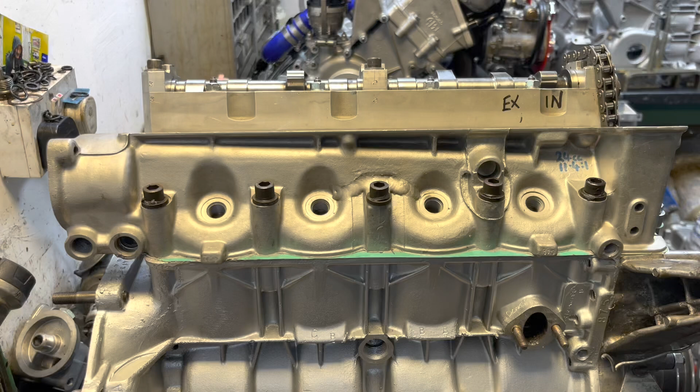Morning YouTubers. Today's video is going to be about how to time up an unknown camshaft.

Now, lots of camshafts have been made for Hillmans over the years, and one of the most frequent phone calls I get is from people asking the question, what do I dial this in at? It's doing this, what should this be? And I'm like, well, all I can say is, as a rough guide, we always say put the inlet between 15 and 20 thou ahead of the exhaust. And that probably sounds like complete gobbledygook if you're a bit of a newbie to engines.

But what I'll try and do is not digress and go down loads of different roads. I'm going to talk about the engine as a one-cylinder engine with the two valves and the cam lobes. And basically, if you've got a Hillman with an unknown cam and you want to time it in, by the end of this video I'm really hoping you'll be able to do that.

So this camshaft in this customer's engine, there's no literature on it. It's called a GB72, which is an old school George Bevan camshaft grind, and I assume that 1972 was the year of manufacture. So maybe this was the cam that they used in the touring car championship in 1972. So really nice piece of old kit. It's actually a steel cam as well, so it was probably one of his race engines of the day.

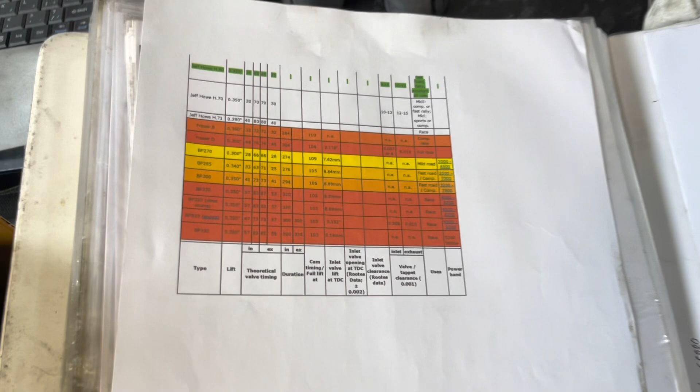So I go over here now with the camera to my little book, and we've got all different camshafts and the specs, and I basically can't see anything about a George Bevan camshaft. So what are we going to do to time it up? Well, as a first step we're going to find a really good TDC. So imagine you're in your garage now, where you need to know when the piston is at the top of the bore, because that is where we set the camshaft.

So what we do is we get some paraffin or diesel or kerosene in a little Fairy washing up liquid tub like this. I use this for CCing, but this will serve the same purpose.

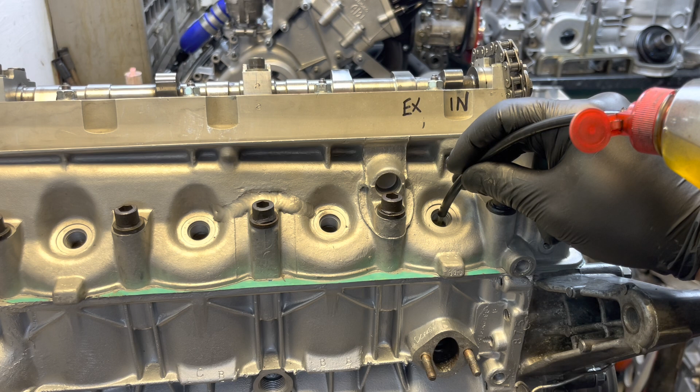The easiest way of getting a good TDC figure, in my opinion, is make sure the lobes are at the top so that that cylinder is sealed, both valves are shut, piston's near the top, and then we just squirt the fluid into the cylinder chamber until we see it at the bottom of the spark plug thread. Okay, I can see it now.

So what we do then is we put a spanner or a socket on the crank, and basically we move it backwards and forwards until we see the fluid at its highest point. So I'll just try and get a bit of a zoom in on the camera. That's the wrong way. Oh, right, great. So we can see that.

Are you ready for the posh word that I learned off the internet? The meniscus. I've been practicing that for you guys. So that's the fluid that makes a funny shape because it's got surface tension. So we can see that just there is our highest point. So we know that is when the chamber is at its smallest size and the piston is at its highest point.

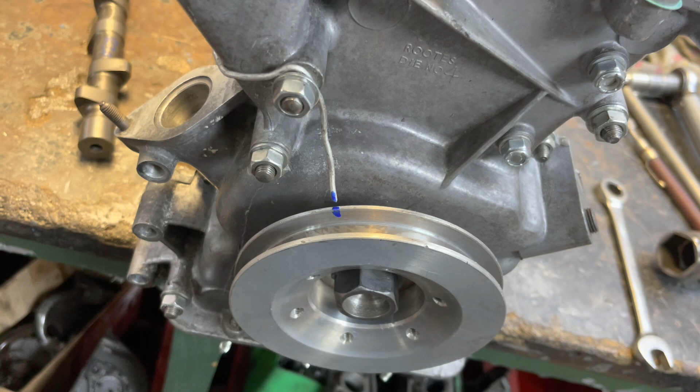Now, what I like to do when I'm timing an engine up: it's great having a bit of a paint mark, but if you just get a bit of old solder or aluminium welding wire, as I've got here, wrap it around the nut, tighten it up, and get it really close to the front pulley, you can make yourself your own TDC marker that you know is going to be accurate, because we're going to have to come back to it and forward from it while we're doing this operation. So it's really good that we've got a TDC marker.

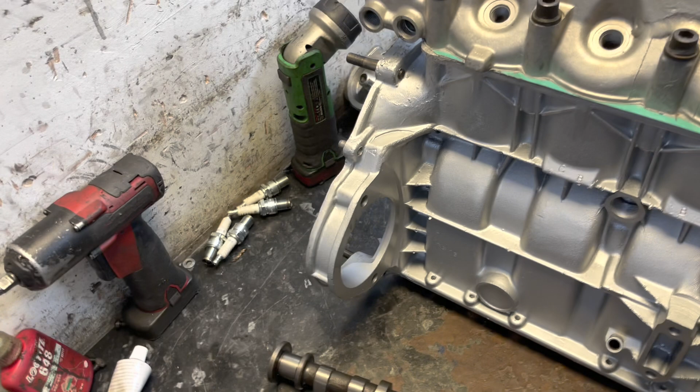So what I'm going to do now, it's always good practice when messing with cam timing, we'll just bring it away from top dead so that if we start moving the valves, we're not going to catch the piston. And then we're going to talk a little bit more. I've got a demonstration cam here, just to talk about the camshaft and how it works.

So if you've watched any of my other videos, you'll know I like talking about overlap, which is where we hold the valves open on the exhaust stroke, at the top of the exhaust stroke, to cause the scavenger effect, so we get a good cylinder fill and a really good bang.

So a race camshaft like this, if you look at the lobes, you'll see they're both higher than the base circle. So what that means is when these are obviously pointing downwards, it's on overlap. Both valves are held open at top dead center, and that is what we call a TDC lift figure. So we haven't got any figures for this cam.

So what we're going to do is put a clock gauge on it and measure what we've got on the inlet at top dead center, or we're going to get evens, sorry. So we'll wind it on so the buckets look level, and we'll back it off, measure the inlet, then go back to 0, and then we'll wind it off on the exhaust and measure that, and that'll give us 2 figures. And from them figures, we'll determine an evens figure.

So say if we do it to start with and we didn't quite get it right, we might get 160 thou on the inlet, 140 on the exhaust. So then we'll go back and try for 150, 150, and basically we'll balance it out. When we've got that top dead center figure, that evens lift figure, then we can decide how much advance to put on the cam, depending on what it is.

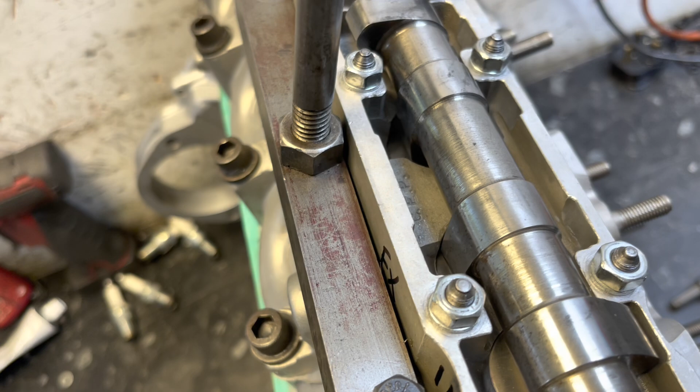So I'm going to move the camshaft around because we know the piston is out of the way. And what I'm trying to do is gauge what I think is a good evens figure, just to start with, before I put a clock gauge on. So I'm just trying to gauge how far the buckets are, which is really hard on this engine because it's got this lovely Carter cam carrier that stops it from seeing.

So what we'll do is, you might not have this option because you've probably got a manifold on, but if you've not got a manifold on, what you can do is look down the port at the back of the valve. I'm going to try and shine my light. Can you see the inlet valve is open there? There you go, you can see it.

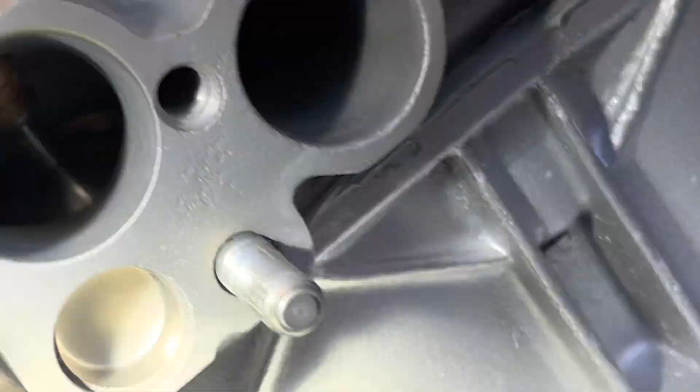The valve's open there, and the exhaust valve, if I can get the torch to line up at the right point, is open more. You can see that's open more. So we need to back it off a little bit. So we'll back it off a smidge. Just bring the camera out.

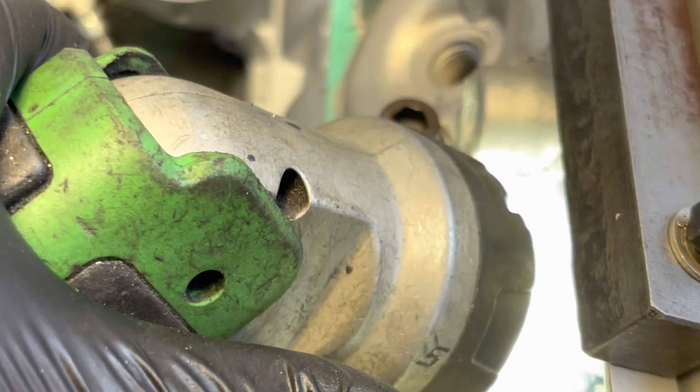So I've set the valves evens at top dead, or as close as I can by eye. And I just realised when I was trying to hold the torch and the phone, there's an easier way of doing this. Basically, if I shine the torch down the plug hole there, the light bounces off things in the chamber, and if we zoom in, we can see that the valve is open on the inlet and on the exhaust, and they look pretty even to me.

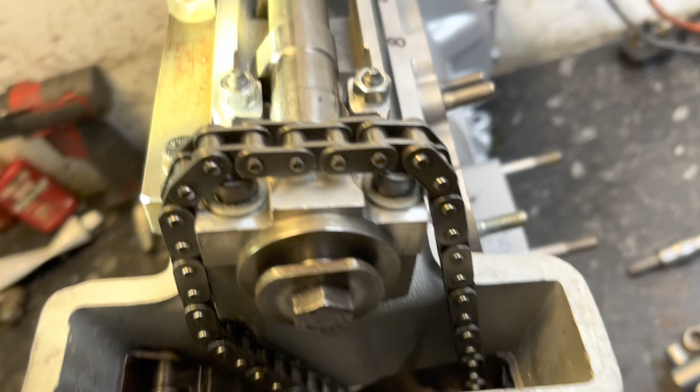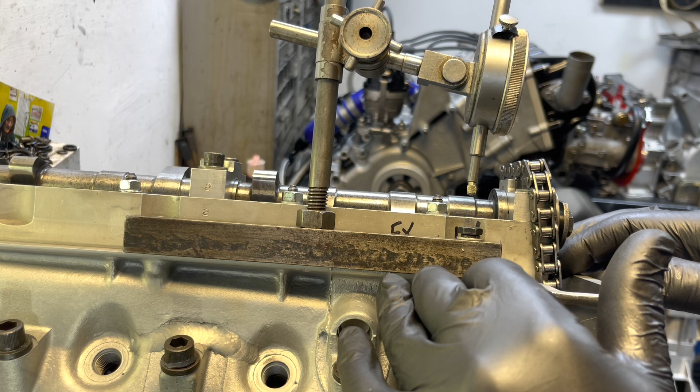So we'll put the clock gauge on now. If you haven't got a clock gauge, you can buy all this stuff off eBay. This is quite a nice one because it's on a nice block that bolts, but you can just have a piece of plate that bolts to the cam cover face, and then a magnetic base with a clock on it. All this stuff is really, really well available.

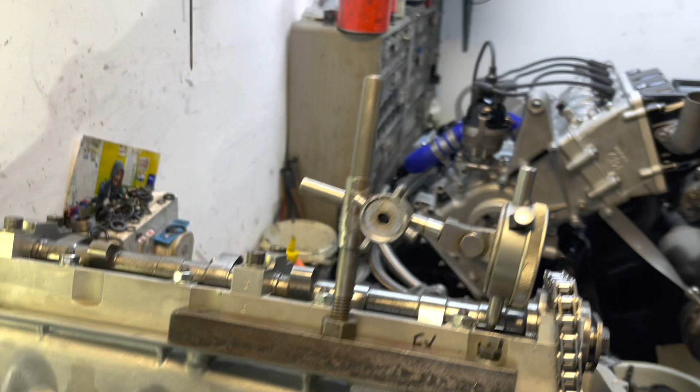So what I'm going to do is put it on the top of the bucket. Just put a little bit of pressure on, so we just see the needle start to move. And then we're going to wind it off and measure the lift. So we have to zero it. I'll spin the engine a little bit so that we can get a good visual on this with the camera for you guys.

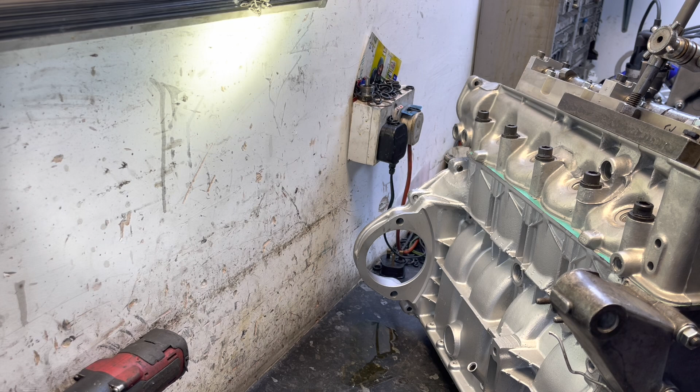Right. Wedge the engine a bit so it doesn't rock around and spoil the camera view. Should have prepped this better, shouldn't I? Never mind. Right, engine's quite steady.

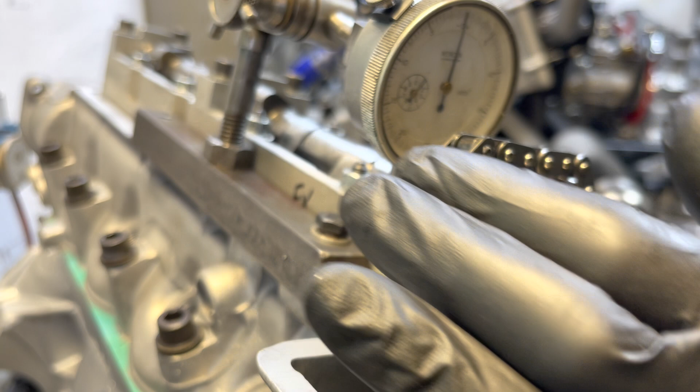Right, so if I set you up like that, hopefully you'll be able to see exactly what I'm talking about. I think the cam is in a fairly even position. So I set the clock to zero, and then because the cam lobe is on lift, we have to go in an anti-clockwise direction to bring it off lift. First thing, we know the crank's in a safe position, pistons aren't near the top, so I'll start backing it off.

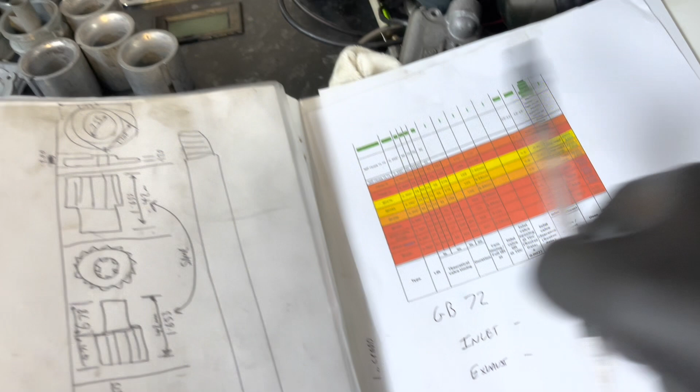So one revolution is 50 thou. Two revolutions is 100 thou. That's 150 thou. And then we've got 150, 5, 10, 15, and 2. So that's 17 added on to our 150, so it's 167. So we just add to our sheet some information here. We're starting with 167 thou on the inlet.

Then, very simply, we have to get back to our start point before we can measure the exhaust. So I'm going to put lift back on the valve now. We've wound it off so it's got no lift, and I'm winding it back on. That was our 17, that was our 50, that was our 100. And when we get to zero now, that should be our 167. Right, so we're at zero again now. The cam is back in what I thought was an evens position.

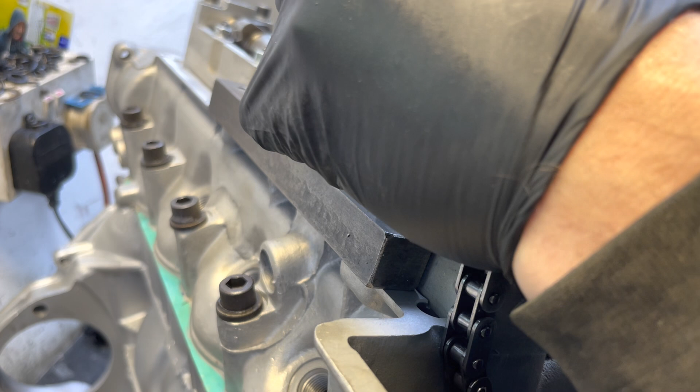Then, dead simply, move the clock gauge over to the exhaust cam follower and bring it down. Always try and hold the clock gauge as vertical as you can. Because as the follower comes up, if the clock gauge is at an angle, you don't get a true measurement. So it's very important to keep the clock gauge as straight to the cam follower as possible to get an accurate figure.

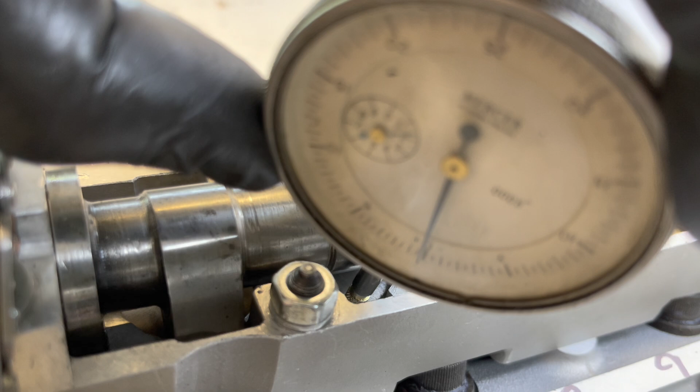Right, let's get this around here. Bring this down a little bit. Okay, so we're on the exhaust now. To wind the lift off the exhaust lobe, we go the opposite way, in a clockwise direction, because the lobe is over here and we want it to come off lift. Can we see that? Move the block a little bit, try and get it as clear as possible for you guys. There you go, that's a bit better.

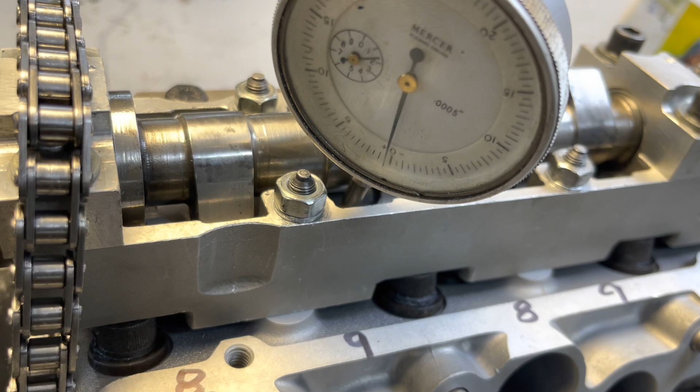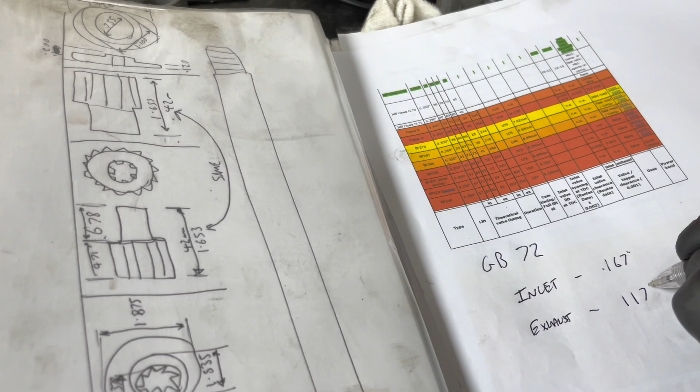Okay, so I'm going to wind the lift off now in a clockwise direction. So we've got 50, 100, and 117. Right, so I didn't get that right, did I? 117. And the reason I didn't get it right, although it looked good, is probably that the valve heights aren't uniform. So when looking through the chamber, you get a bit of an iffy image.

So we look at these figures now: 167, we call it 170, and 120. That would be too much. I think this is going to be evens at about 140. So we'll zero this because we're off lift, and we'll put 140 thou on it, and then we'll see what that gives us on the inlet. I've got to go anti-clockwise now to put the lift back onto the lobe, onto the follower. So 50, 100, 125, 130.

That is 140. It's just the camera angle looks bad. Right, so that's 140 on the exhaust. Now what I'm going to do is I'm just going to put a little marker referencing where I think the evens figure is going to be. So a bit of a mark on there with blue paint.

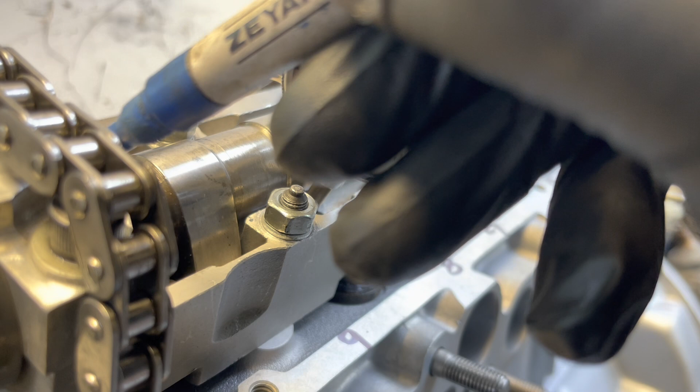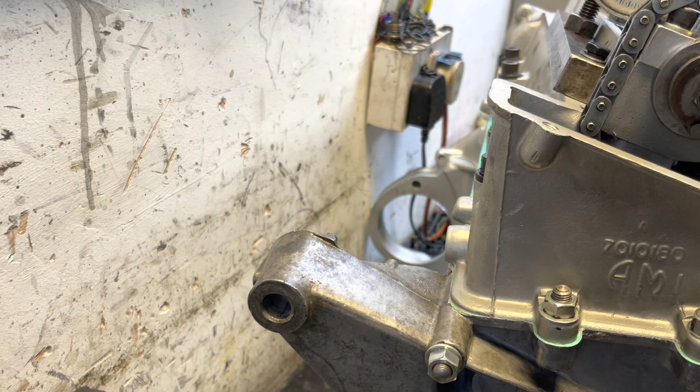Right, and then what I'll do is bring this over to the inlet side and bring it down, and we'll wind it off and see what we've got on that. So I'll bring the camera around there. Okay, so we're back on the inlet cam now.

And I want to basically wind off from there. So I'm going to zero it and go in an anti-clockwise because it's on lift this way. So it's the opposite from the exhaust. So 50, 100, 150, and let's call that 158. So 158, 140.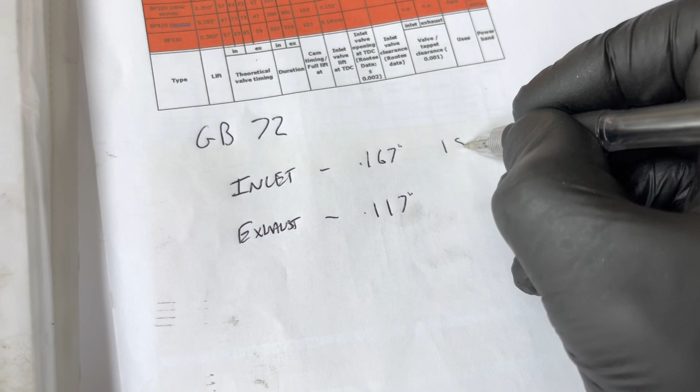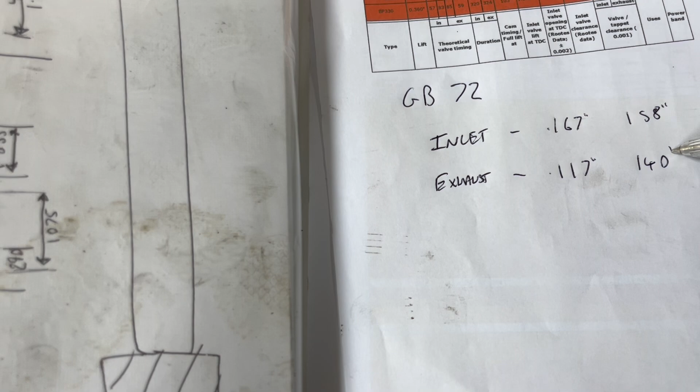So we'll write these figures down here. So we had 158 on the inlet and 140 on the exhaust. Now that is actually giving us 18 thou more on the inlet than the exhaust, which, to be fair, is probably where I'd like to start the cam off.

What you've got to remember when you're dealing with a cam like this is having it 5 thou ahead or 5 thou behind doesn't necessarily kill the horsepower. It just moves it. It's robs and gains. So with a camshaft, the more you advance the camshaft, so the more lift we have on the inlet, the lower down the torque curve the power is produced. And if we retard the cam, so the figures are more evens at top dead, then the further up the power band we produce the power and we lose mid-range torque. So it's all robs and gains.

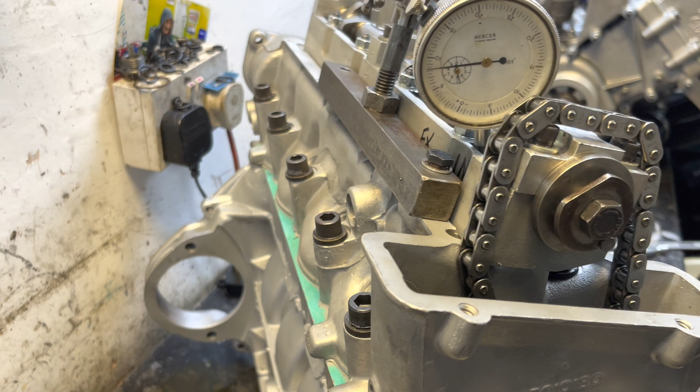So I'm actually quite happy with that at that stage. I think 158, 140 is a good starting point, and we'll put it on the dyno. And if it's happy and doing the predicted sort of torque and horsepower I want it to, we'll leave it alone. And if it isn't, then we'll revisit it. But I'll turn this off now and we'll go to the next stage.

Right, before we go through the next stage, which will be timing up the camshaft with the chain relative to the crankshaft position, there's something we should always do when we do an engine build. Really, this should have been done at an earlier stage than I'm doing now. But if you've got to this stage, it's still good practice to do it.

Now I know, because I did it when the head was loose with no valve springs on, etc., I know what the total lift is before the valve contacts the piston at top dead center. And this is a very important figure. I use a figure of 250 thou. And what that is, I use my little mitts to describe it. We've got our inlet and exhaust valves. So the piston comes up and basically, I've done that wrong, haven't I?

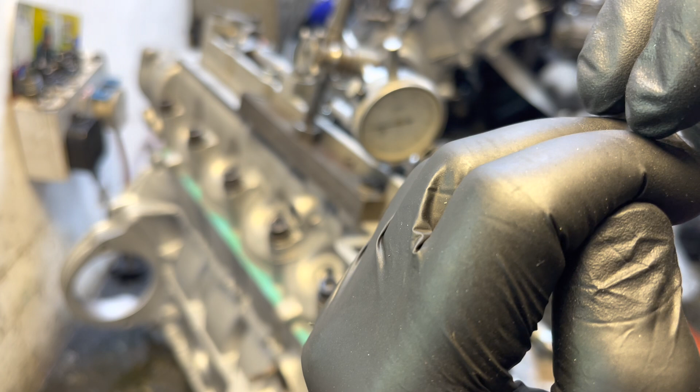So the exhaust valve has been open as the piston has come up, and then the inlet valve started to open, so we get the scavenge. So there becomes a point where, as the piston goes down the bore, the inlet cam chases the piston down the bore. And when we're using modern profiles especially, the acceleration of the valve can be so fast that even though we've got clearance at top dead center, just after top dead center the piston's dwelled, you see, because of the angle of the rod. The valve catches up and hits him.

So we're running on this engine 158 thou of lift at top dead center, but the piston won't have moved much at, say, 10-15 degrees crankshaft rotation, and the valve will have accelerated and will be chasing him down the bore. That's why we need a minimum really, on this cam, of 220, 250 clearance at top dead. There's a really easy way of checking it, and I'll show you.

So basically, we've got the piston, the crankshaft here. I'll just bring this round to our marker because we've had it in a safe position all this time, haven't we? So I'll bring him round. Oh, I just have to move the camera out of the way. Right, we just have to start again with this because I noticed that the camera had dropped down and you couldn't see the clock gauge, and I wanted you to be able to see that, so it gave you a better idea of what was going on.

So we've got the piston well down the bore, and basically what we're going to do is put a bit of lift on to get the exhaust cam out of the way so that we can come back to top dead center, because really we should do this with no cam in it and with no valve springs on it and the head just bolted on, so we can measure the little clearance. Anyway, that's where we're at.

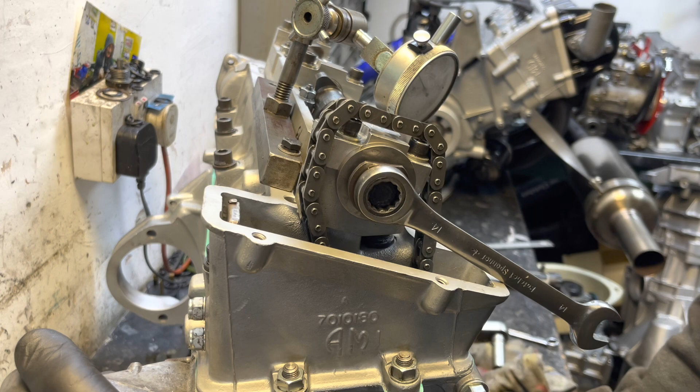So what we've got to do now is we'll bring this back, and I'll go to my blue marker that I made on the cam, because I know that means I've got 140 thou lift on the exhaust. So we'll zero it on the exhaust now, and try and get a decent camera angle for you guys.

Right, so what I'm going to do now is wind the lift on the exhaust cam until that one contacts. So we know we've got 140 because that's our blue mark, which was what we wound on before, if you remember. So we've got 140, that's another 50, so that's 190. And we've just come shy. So it's 190 plus 200, 210, 220, 230, 235. So we've got 235 on the exhaust as well.

So absolutely fine. That's plenty of space for it to get out of the way, because obviously at top dead center the exhaust was running less lift, 140. So we've got ample clearance there. So I'm happy with that. So what we'll do now is get the chain ready to go on and time up the camshaft relative to the crankshaft. Right, now there's the exciting bit, the good bit. We're going to time the cam up.

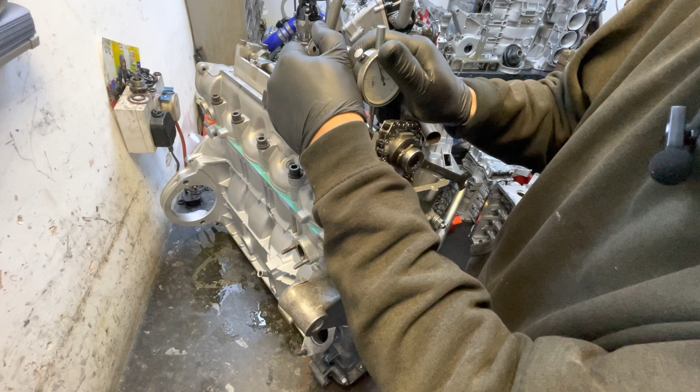So first thing we do, move the crankshaft away from top dead center so it's in a safe position, so when messing about we can't get any valve contact. Second thing, we wind the lift off the cam so we can put our 167 thou on it. So I've wound it off there. Just give that a bit more. So we're definitely no lift on number one inlet, and then we'll put the clock gauge on the first cam follower, wind it on a fair bit like that, so it's got plenty to come out. We'll zero it, and then we will put the lift on the cam.

So we've got 50, 100, 150, 160, 165, oh, one too far, one too far again, 167. Can you see that? Has the camera got that? Yeah, great. Right. So our cam is in our TDC position now. We'll just put a paint marker on here so I can roughly reference it in case I get confused, which is quite possible.

Right. Now, what we need to do next is take this front pulley bolt out. So what I'm going to do, which you're all going to cringe at, is put some mole grips on the camshaft because they didn't put a hex on them from factory. It won't mark it because it's rock hard. So we'll just jar the camshaft up like this, and hopefully it won't move. Okay, and then crack that off. Are we still on 167? No, it's moved. That's great, just what we needed.

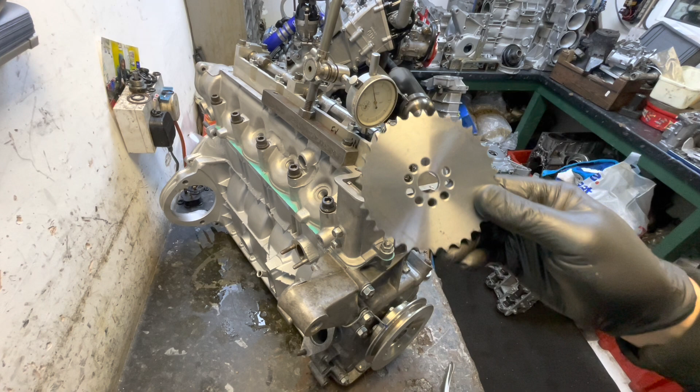And then what I do is, if you can see, bring the crankshaft back round to top dead center. So we've got a little pointer there, and this is called a multi-hole sprocket. Very clever. All these holes are in different relations to the gears, so they're about 5 degrees apart. So in theory, we should be able to get a hole that matches up with the dowel, and then we can get the cam timing correct.

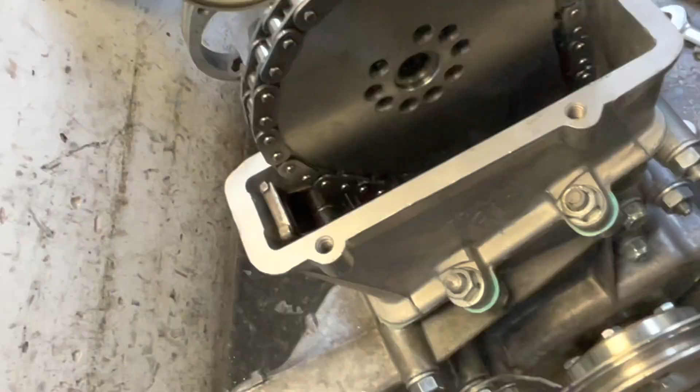So, very important, one side's got a big chamfer radius. Obviously that goes face down so that the cam wheel can sit flat against the thrust face of the camshaft. So there we are, that's the cam sprocket on. Let's give him a little sensor. Also, definitely something worth noting is if we look inside here, this little slider, it can go 2 ways, so it can flick over this way and get caught in the chain. So always make sure it's sat against this little slider that it runs in.

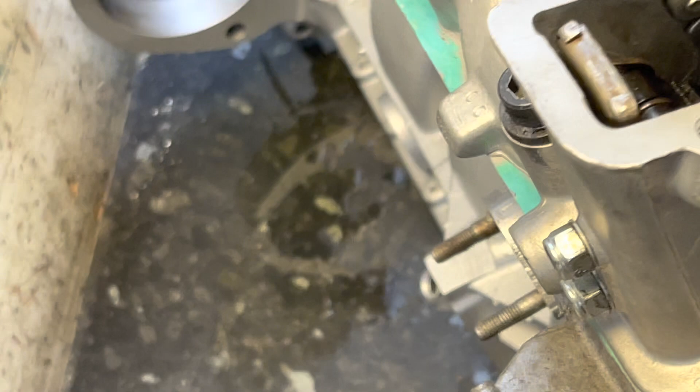Okay, now what I'll try and do is change the angle of this so that we can see into the end of the camshaft and see the line up on it.

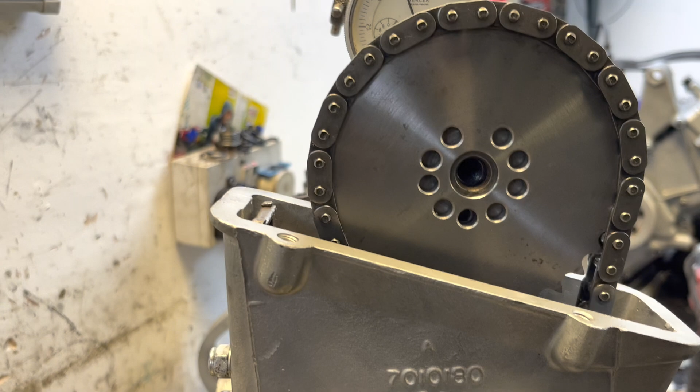Oops, that was clever, wasn't it? Broke the phone midway through. Right, is that showing what I want it to show?

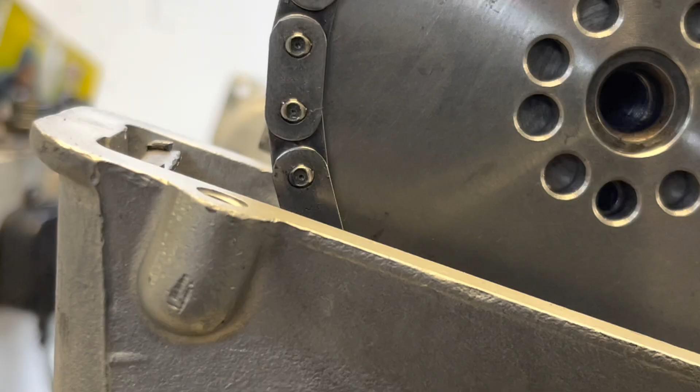Nearly. So if you look through the holes, you can see this bottom one here. Let's just get this a little bit further over. Right, can you see in this wonderful setup off eBay that I bought for about £3.50 straight from Ho Chi Chong, the dowel isn't quite lined up. That's our TDC figure there.

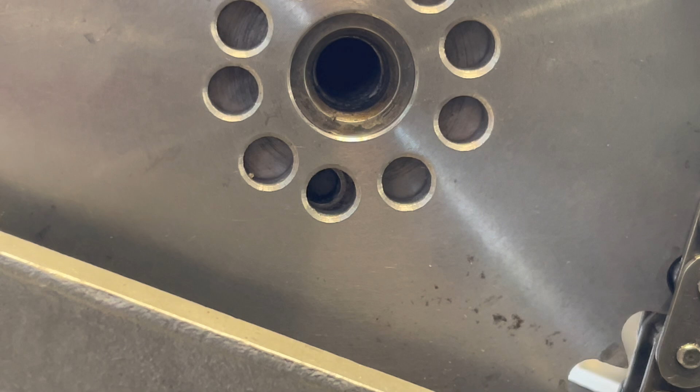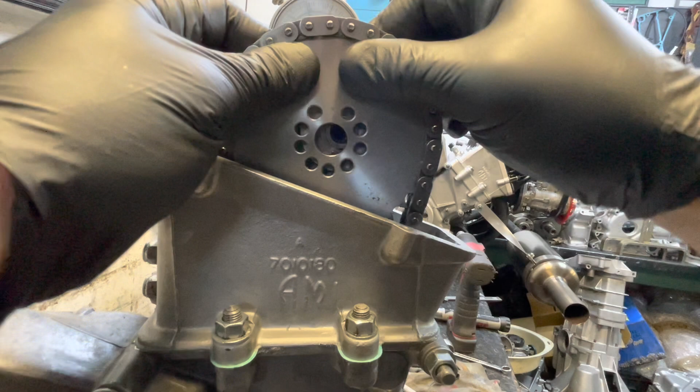Right, okay, so what we need to do is basically we slide this off the end of the cam. Just come out a little bit on my zoom so we can get my fat finger in there. Okay, so we know the crank's in the right place, so I'm just going to move it one chain tooth at a time until I see the hole line up perfectly.

And believe it or not, I can't believe it. That never works like that. The second hole I've come to does actually appear to be absolutely crack on. Can you see it? So what I'm going to do is offer up the pin and see if he wants to go in. Let's give him a gentle tap because they are tight. Yep, that sounds quite good.

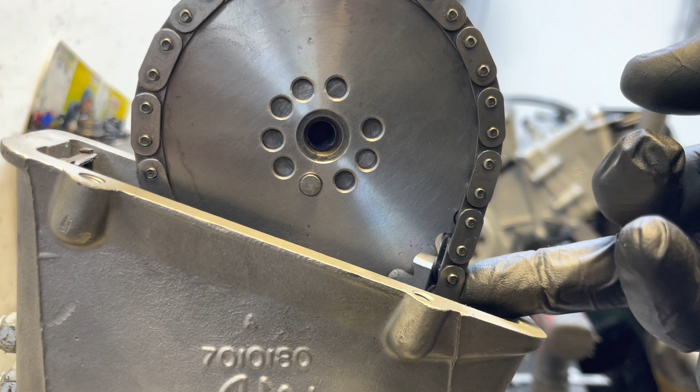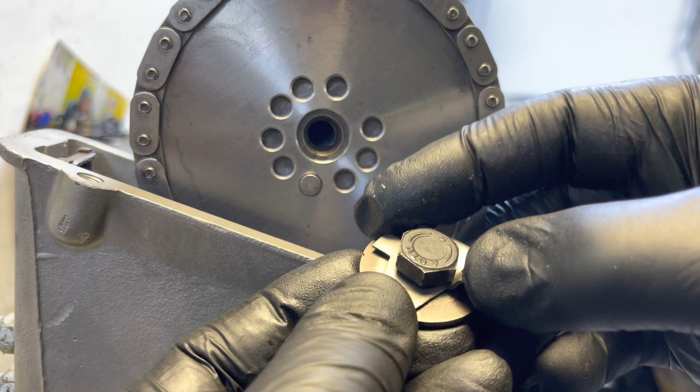Now, if I zoom out, you'll see that through all this operation, we need the chain to be tight on this side because that's the side I'm measuring from. So now, obviously, when I put this together properly, I'll be Loctiting all of it, etc. And you have to use a tab lock washer for one important reason, which I neglected to realise once, and that is this washer, although it does absolutely nothing for holding the bolt tight, that little flimsy bit of steel holds the dowel in, so should the dowel choose to wander, it can't wander out.

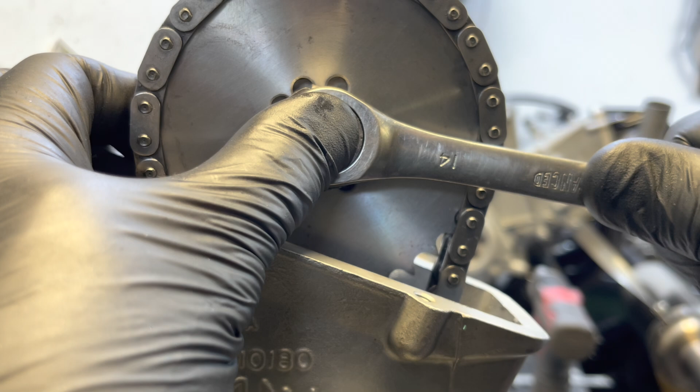So what we'll do is we'll nip it up and then we'll do a lap and then we'll measure it and we'll see if it's roughly where we want it to be. Okay, nip that, not Loctited or anything, and I'll bring the camera back a little bit so we've got a bit of an overall picture. You can see the clock. We'll go into this mode. Seems to give us a better view of what's going on. It's trying to fall over, which is very frustrating.

Right, so we've got the clock gauge, etc. there. So I'm going to move the clock out of the way so that the cam lobe doesn't hit it. And then we'll do a lap of the engine and just let everything settle down. So, listening and feeling all the time for anything that might be potentially catching. Everything feels good, which is lucky. So we're approaching our TDC figure. Excuse me. Right. Okay, we're back to TDC there.

I'm going to pause this a second. Right, okay, I finished dying now.

So we've got the camshaft in top dead center position. So we're TDC here. In theory, we've got a 167 thou valve lift on number one inlet cam valve. So what we'll do is bring this down and drop him in. Just touch on the bucket, because as we wind off, it's going to put the lift onto the follower, and then set him to 0.

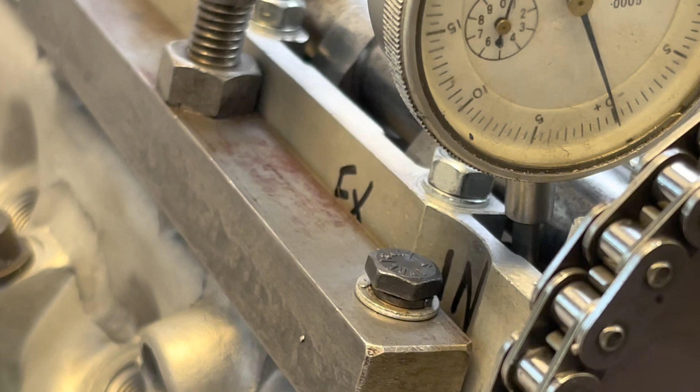Okay, you can just see him there now. So I'll just zoom in a little touch. Oh, that was a bit drastic, wasn't it? Okay. Come back one. Right. So what I'm going to do is I'm going to wind the lift off. So we're going to go anti-clockwise now with the crankshaft to measure the lift that we have.

So we've got tight side of the chain now. So we're looking at the clock gauge. We should have between 165 and 170, I reckon, if I'm any good. So there's 50. There's 100. There's 150. 155. 160. 165.

Oh my God. It's about 168. 2, 3, yeah. 168. We're a thou out on our target. Oh, well, we'll live with that. So, okay, we're all timed up.

Sorry, we had a little glitch with the camera. Something technical went wrong, which was beyond me, but I turned the phone on and off and it seems to be working again now.

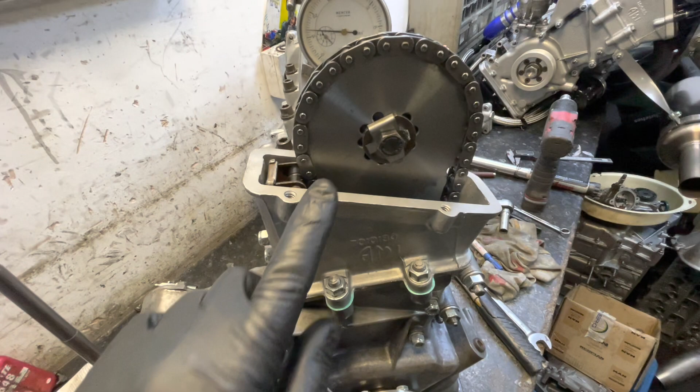So, what I was going to say was, I'm going to take this bolt out now, put some Loctite on it, recheck my timing. I'm happy that's all correct. I don't need to measure on the exhaust because the cam is fixed, so whatever the inlet is, the exhaust will be correct, obviously.

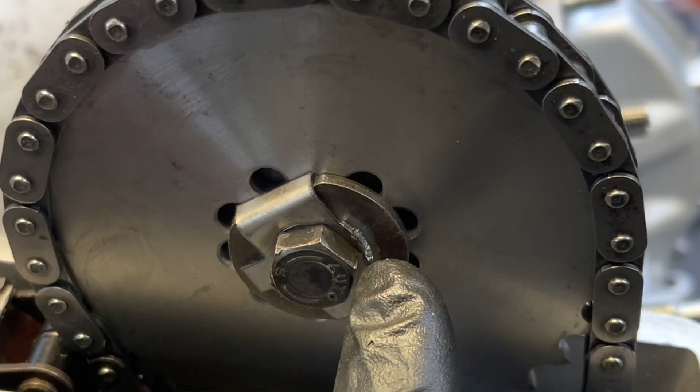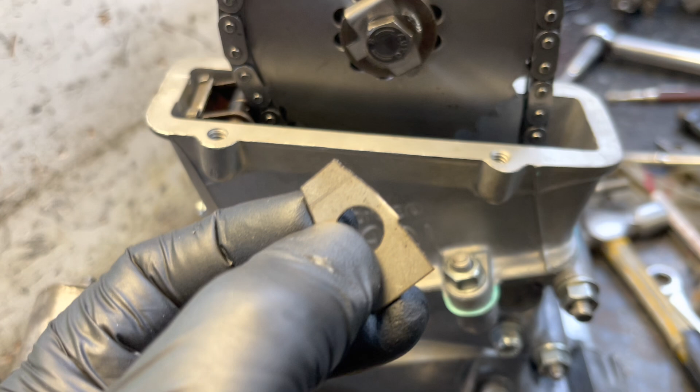Now, what I wanted to talk about for one second is these little tabs, and this will upset some people because the purists love these little tabs, but that is not going to stop the nut from coming undone. And I often find these, when secondhand, they've fallen off and in the sump and stuff. So what I do is I get a new one and I cut the tabs off it so they can't fall off and contaminate the engine.

But I do still fit this because, like I said before, the important thing about it is it stops the pin from wandering out. And you think, well, the pin's driving the cam, right? So how's that wander out? Well, it isn't actually. The pin is just purely for location. The cam is driven by friction. This big washer clamping the sprocket against the end of the camshaft is what drives it.

So if you ever took a modern Ford apart or anything like that, you'll notice they're all on what we call taper drives. So they don't have a keyway. It's all keyless. You set the cams up and you tighten it up and the friction drives the cam. It's much the same as this, although this was designed with a pin in it, obviously. But I've had it where the pin's fallen out and the engines ran fine for years.

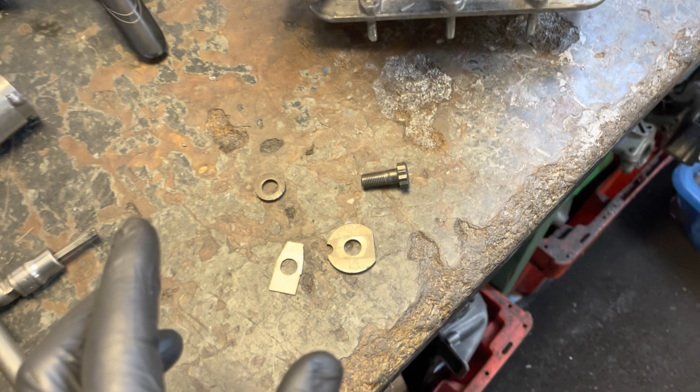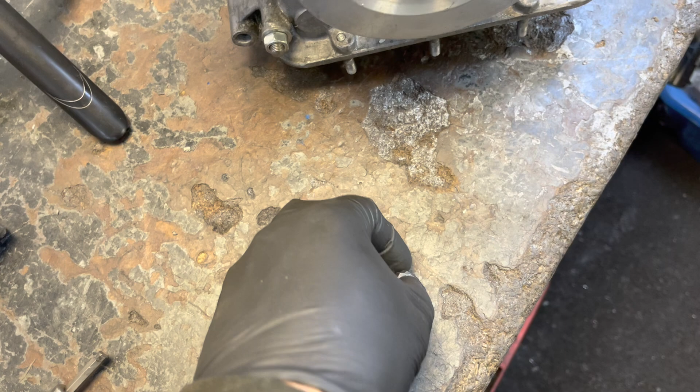Anyway, I'm digressing. So what I was going to say, a little Imp tip. Well, an Imp tip is something that I do. Whether you like it or not is up to you. If you look at this washer, you can just about see it's got a bow in it. And the reason for that is the shoulder where it clamps is so small, the area on the inside of here. Look at this little clamping area. Basically it mushrooms the washer.

So what I like to do is I throw the Imp sprocket bolt away, and this is a bolt that I buy for a Lotus Cortina engine. It's just a 3/8 UNF flywheel bolt, but they're a bit longer and obviously a better material. So put the cylinder head bolt washer on, because that's 3/8 as well. Obviously it's a 3/8 UNC bolt for the cylinder head studs. So we've all got a spare washer kicking around. They're lovely washers, good thick washers.

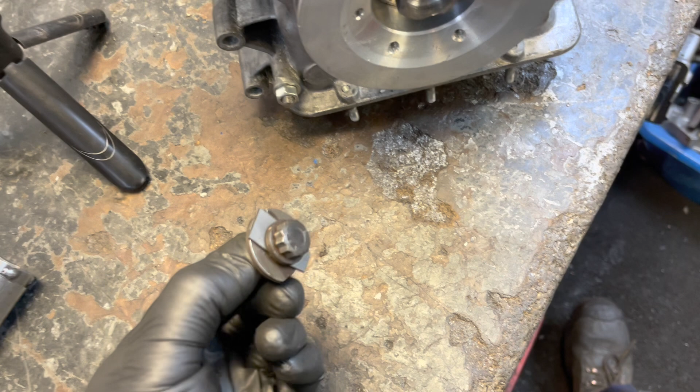So I hope you've enjoyed the video and you've learned something, and you can feel confident in timing up that unknown camshaft that you've had sat in the top drawer of your garage wondering how it'll work in your Imp.